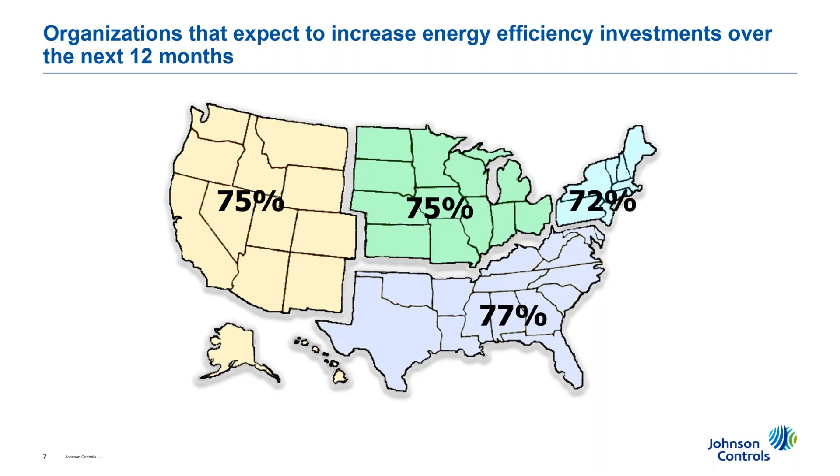One question we ask is: organizations, what did you invest in the last year? And there's about 25 different improvement measures. People generally get this right because they know what they invested in. Again, these are facility leaders in commercial, institutional, and industrial sectors.

The other question we ask is, what do you plan to invest in over the next year? The winner this year was behavior and education programs. HVAC and building controls are kind of perennial favorites, usually at the top of the list. Electric energy storage actually ranked fourth, with 59% of organizations planning to invest in electric energy storage. As you can imagine, this question 10 years ago, if we asked it, would have been incredibly small. So you see this particular clean energy technology rising to the top. Building systems integration and demand response and demand flexibility investments, over half the organizations investing in that. Next slide.

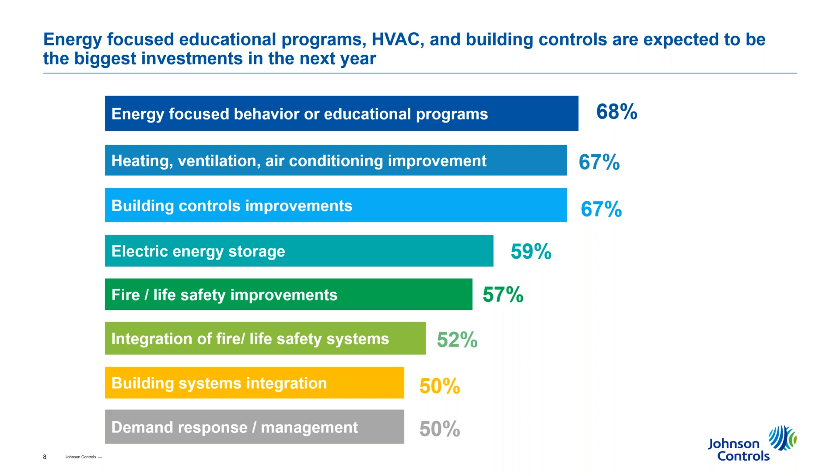So the question we have been asking for 13 years is, do you have a green certified building, or do you plan to have one over the next 10 years? This data has continued to rise, a 4% increase on average over the previous year. Here you see pretty even distribution, with the South actually having the highest percentage of already achieved and plan to achieve.

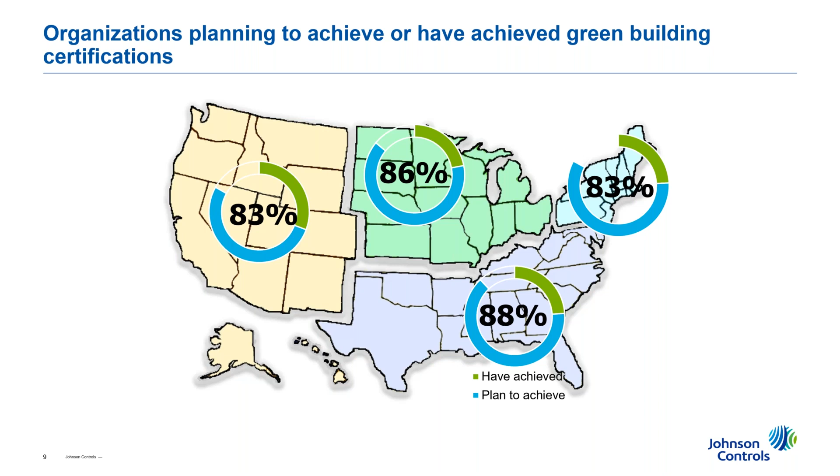Now, this is the question we've started asking over the last 4 or so years, and it's most interesting to the NBI organization and participants at the conference. That's, how likely are you to achieve a net zero facility? It could be net zero carbon, net zero energy, or near zero, which is the term used in Europe, since this is a global survey. We give a series of synonyms for super high performance buildings over the next 10 years.

This went up significantly over the past year. 67% in the Midwest, 70% in the South. What I found surprising is I expected the coasts, the East, Northeast, and the West to be the highest percentage, but actually there were higher percentages in the heartland of the United States and the South.

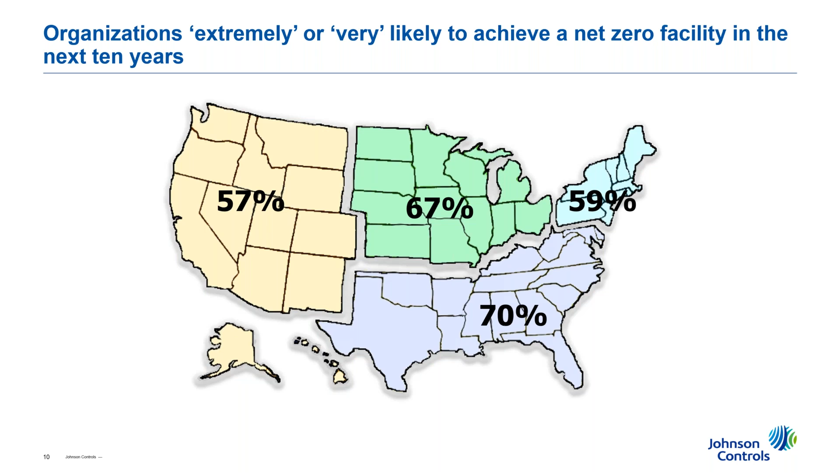One thing we did this year is, because we had so many organizations planning to achieve net zero, we had two very large populations: those planning to be net zero and those planning to be not zero. So we did a little analysis looking at the different investments between these two populations, about 200 organizations each, and I think these results are really interesting.

Sorry, Siri thought I was talking to her. Sorry about that, Siri looked up high performance buildings. Anyway, thermal energy storage ended up being very high.

Electric battery storage was ranked so high in both populations it didn't make this list. Non-renewable distributed energy generation - that's an interesting question. Why would organizations planning to be net zero energy or carbon invest in fossil fuel-based distributed energy generation? I'll tell you our hypothesis and some data to support it. Mobile occupant interfaces, which provide direct information from the building and to the building, control HVAC, lighting, and renewable energy.

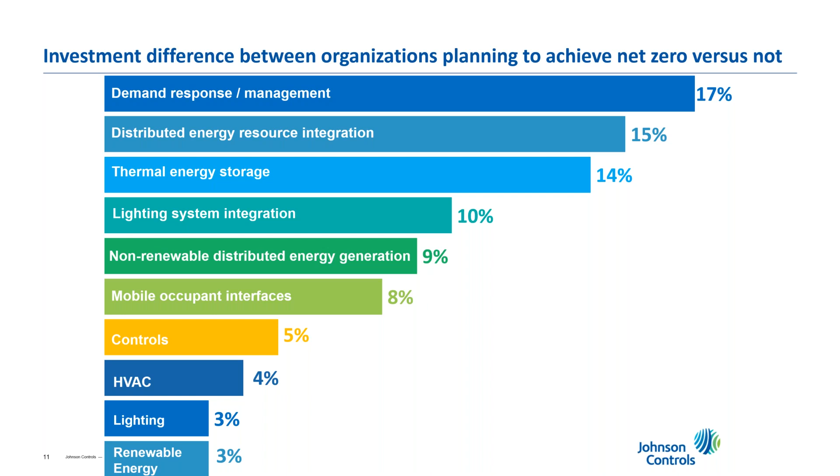Our hypothesis is that there's a tremendous overlap between organizations that plan to have a net zero carbon or energy building and those that want to be able to operate off the grid and are focused on resiliency. When we tested the hypothesis, we found an R squared, or correlation coefficient, of 0.66, which is a moderately strong correlation between those organizations. So organizations driving towards net zero are also keenly interested in resiliency and long-term operation off the grid, and investing in fossil fuel non-renewable energy, probably CHP, cogen, things like that, in addition to the more clean technologies.

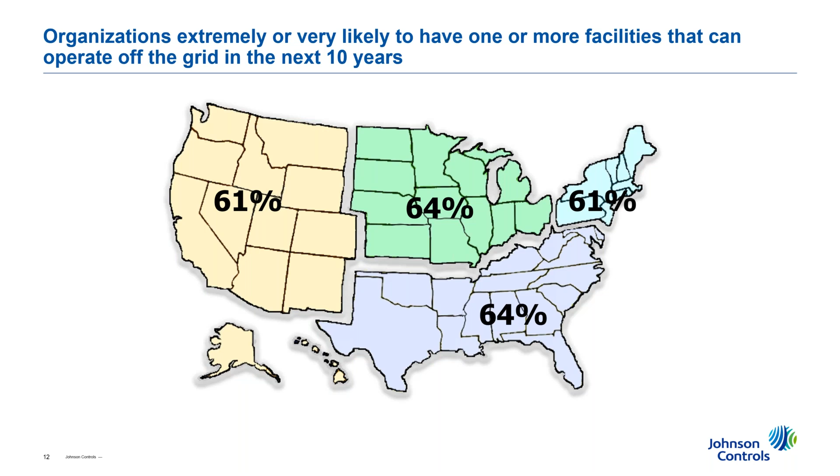So here's one key question. We asked among the measures, how many of the organizations replaced a fossil fuel heating system with heat pumps in the previous 12 months? We were again very surprised at this level. 35% in the West, 36% in the South, in the mid-30s everywhere across the country.

Generally, people believe that one of the curses of energy efficiency and green buildings is that people wait for stuff to break - they wait until a piece of equipment fails, then replace it. Unfortunately, some of the least efficient equipment tends to last too long. Proactively updating - replacing things like fossil fuel heating with heat pumps, replacing HVAC, replacing controls before end of life - is one of the trends we see increasing over the past few years, and I think that's a very positive trend.

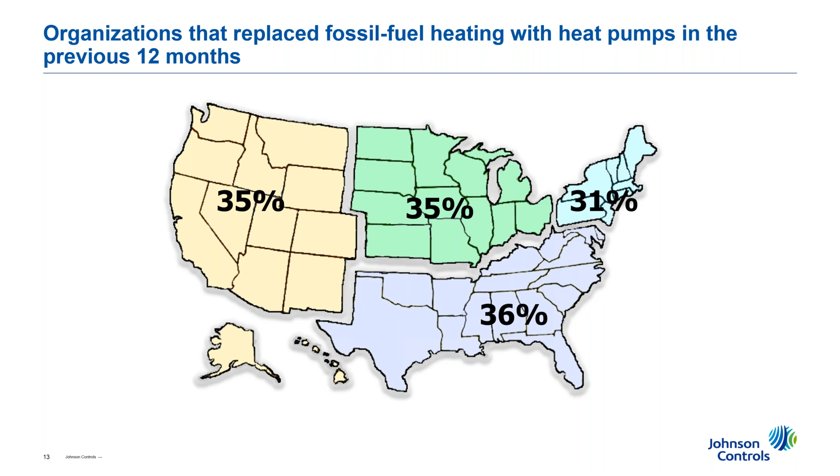So this is the sneak peek. About 3 weeks ago, we finished the 2020 energy efficiency indicator, and we asked a number of new questions that relate to the coronavirus and investments as well as impacts. And I couldn't resist the temptation to give you a peek at the results.

One thing is the percentage of organizations reporting that improved occupant health and wellness is extremely or very important increased from 62 to 74%. Not surprised at all of that.

One of the highest rated drivers for investment, 81% said that increasing the flexibility of their facilities to quickly respond to a variety of emergency conditions like a pandemic, natural disasters - think of wildfires on the West Coast, think of tropical storms, we have yet another hurricane hitting New Orleans, third time this year - that type of flexibility is extremely or very important.

I would encourage everyone, as they're thinking about high performance buildings that are net zero, they also need to be resilient and healthy and safe. Next slide.

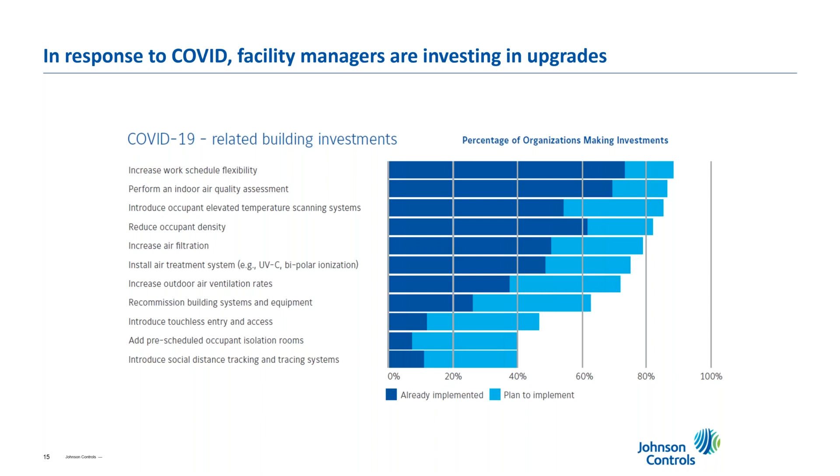This is becoming a really big surprise, but data is supporting it from all corners. Most buildings, say office buildings in New York City, are or were at their bottom, about 4 to 6% occupied. And what's been surprising is how little the energy has dropped.

I think what this is teaching us is that as we're adding flexibility to facilities, we need to be able to dial down. GRESB portfolio of buildings, which tend to be higher performance and greener, are doing better - they're in the 30 to 40% range. And anecdotally, net zero buildings, which really control plug loads and really control at an individual occupant level, are able to dial down even more. I think this is a key attribute in all high performance buildings in the future.

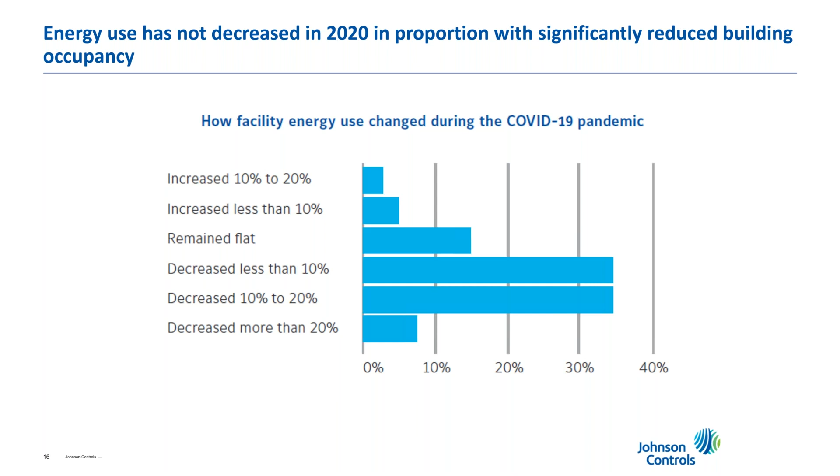So that ends my sort of update presentation here. And now I'd like to introduce our next panelist.

Shanti Pless joined the Commercial Building Research Group at NREL in 1999 with a focus on applied research and design processes for commercial building energy efficiency and building integrated renewable energy. He's leading the development of the next round of advanced energy design guides and managing the whole building systems integration section of the group. Shanti, over to you.

Thanks, Clay. Welcome all. And I kept my title slide from a year ago here. This is a subset of what we talked about from a year ago. So well, 10 minutes to quickly go through what we saw a year ago.

I probably have some new updates since then, but kind of set the stage for the remaining speakers to kind of think about and talk about the future of energy efficient buildings as the grid changes.

You know, I think as a building energy efficiency researcher, I spent 20 years focused on things like zero energy buildings and zero energy design guides and really aggressive energy efficiency. That was all about kind of saving as much energy as possible, any time of the day, any time of the year, and netting out kind of your renewables over the course of a year. That was kind of the first generation of net zero energy buildings we've all been working towards and on.

And looking for the next 20 years, how is that going to change? The key element we're looking towards is how this new era of cheap renewables on the grid will change, and how the future of buildings and future of zero energy buildings will have to adapt - what's their role, right? That's kind of what I talked about a year ago.

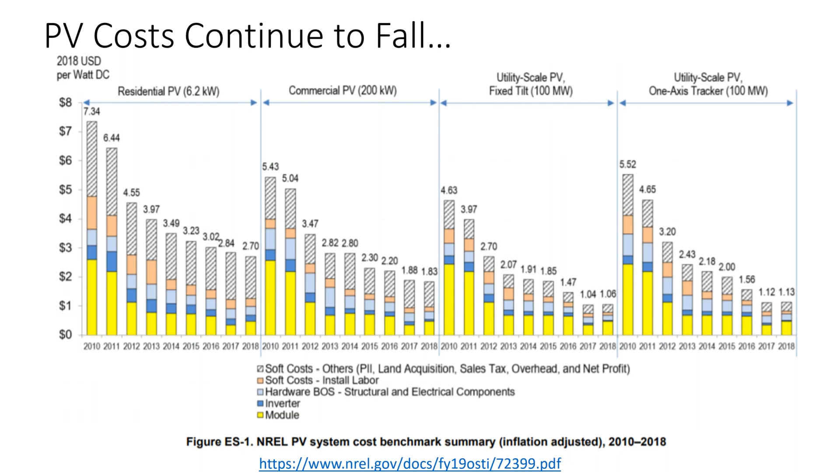Wind, solar, and storage also have similar cost declines. I'm at NREL in Colorado, so we track what's happening locally pretty closely just to get a sense of it. Our utility here, Xcel, is planning to install new generation and put out an all-source bid.

The average they got back was 1.81 cents a kilowatt hour for a combination of solar, wind, and storage. That started to open our eyes up, and then they went back and got more firm bids on that all-source call: solar storage at 3 to 3.5 cents a kilowatt hour, wind lower than that.

So we're starting to see these projects put in place, and that's really driving commitments statewide to get to 50% renewables in the next few years. As large utilities like our utility here in Colorado, Xcel, or others are now making these commitments, in this past year they've committed to 100% carbon-free electricity by 2050.

And so as they see these cost curves, this is kind of where the macro scale seems to be going on the grid. As an energy efficiency researcher, for all of us who've spent the last 20 years trying to figure out how to get utility efficiency programs in place to take advantage of historically the lowest cost of energy—the energy you don't use.

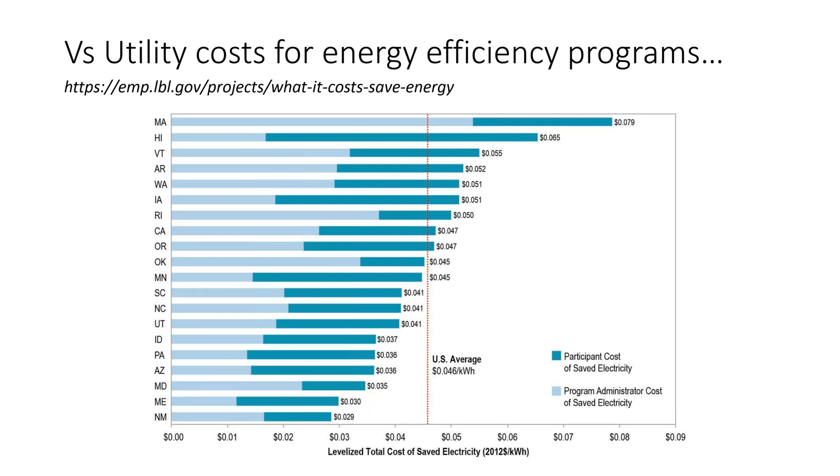We think about whether typical utility efficiency programs will go down—there are significant investments over the years in those. Saving energy in hours of high renewables on the grid, where the marginal cost and marginal carbon on the grid may be negative, is maybe not so much of a benefit anymore to save energy at all times. So kilowatt hour savings anytime, anyplace is now becoming important for us to think about as kilowatt hour savings at the right time, in the right place.

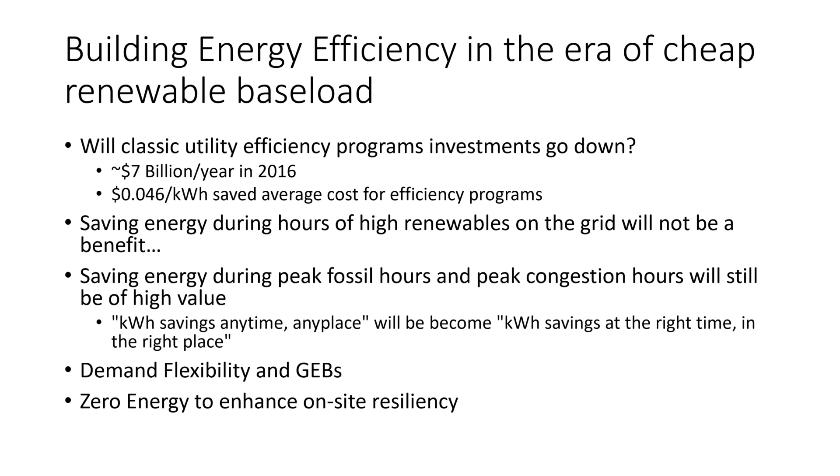As we transition that thought, this concept of demand flexibility in buildings—what the Department of Energy and others are now calling grid interactive efficient buildings, or GEB—starts to value demand flexibility and responsiveness to the changing renewable content on the grid. And as Clay mentioned, zero energy enhanced on-site resiliency is definitely making the case for better demand flexibility and storage integration.

From a simplistic point of view, you look at the grid where you've got high net load in the later afternoon, say in California, with low renewables on the grid, and significant low net grid demand hours in the middle of the day. That's starting to create some simple ideas around moving load from those peak hours later in the day for your utility. Every utility in the United States seems to have a different version of this, whether it's a wind-dominated grid, or solar storage, or when your wind peaks seasonally.

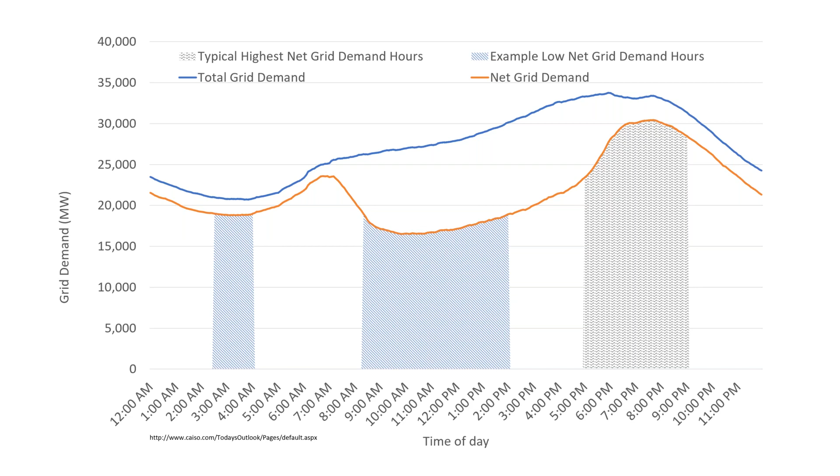So understanding how your utility is adding renewables and what that resource looks like will then allow you to think about your demand profile. And I think it became real for me when I saw major tech companies commit to 100% renewables a long time ago.

So they bought a bunch of offsite renewables, owned a lot of offsite renewables, and netted out where they owned or purchased more offsite renewables than their loads in 2017. But then they started realizing what's next, and for them it was about how to match their renewables on an hourly basis with their loads.

This is the idea of 24/7 carbon-free energy. So they've spent the last couple years trying to figure out how to reach 100% renewables, 100% of the time.

Going forward for buildings with net zero energy goals, starting to think about how well, on an hourly basis, your load matches your renewables so you can target this goal of 100% renewables 100% of the time is in line with what some of the big tech companies are thinking about.

They do things like move compute in their data centers around to different parts of their facilities where they have high renewables for every hour, and if there's a high mismatch, they can move that compute to other data centers with a lower mismatch. Really innovative strategies are coming out that target this goal of 100% renewables 100% of the time, whether in your building or on the grid.

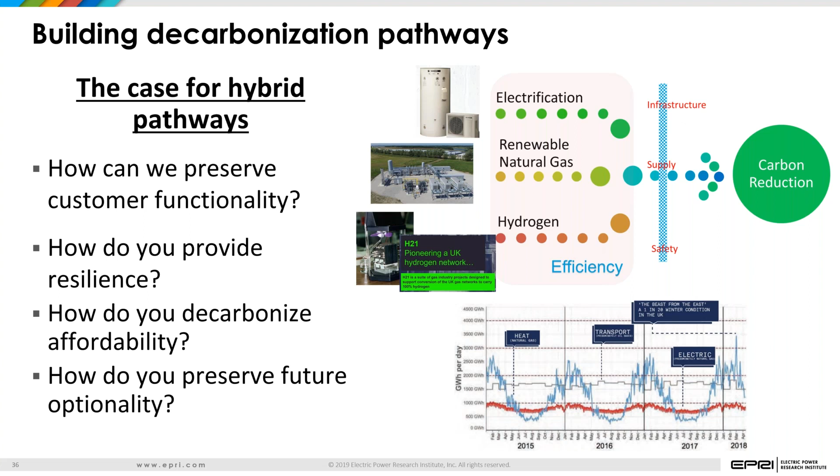So that's the approach that I'm going to take in the presentation. I'm going to run through very quickly through some use cases, some of the field demonstrations and the learnings from those, and hopefully we leave with more questions than answers as we go through the presentation. I'll be going quickly through some of those.

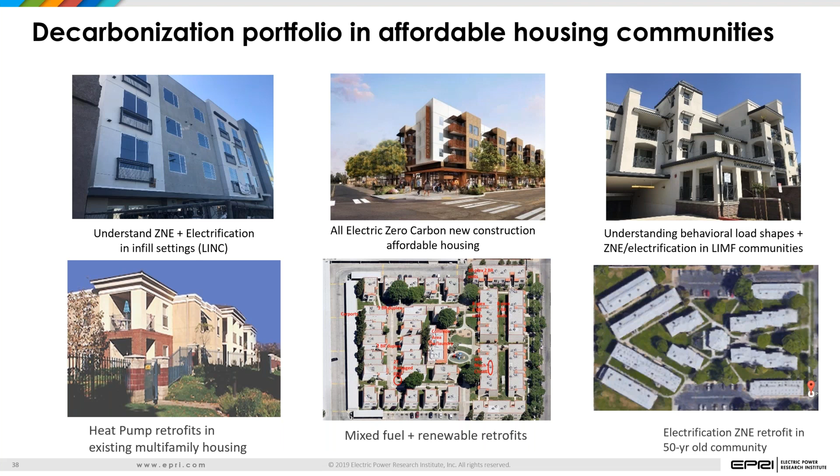We talked about some of the zero carbon communities. Clay already talked about it. I'll skip through this. There's a lot of work that we do in actual field implementation, especially working with affordable housing and multifamily communities. We do a lot of work in single family new construction. So there's a lot of lessons learned in actually applying these technologies, not just from a technology analysis or a lab perspective, but what happens when you put technologies in the field and customers interact with them.

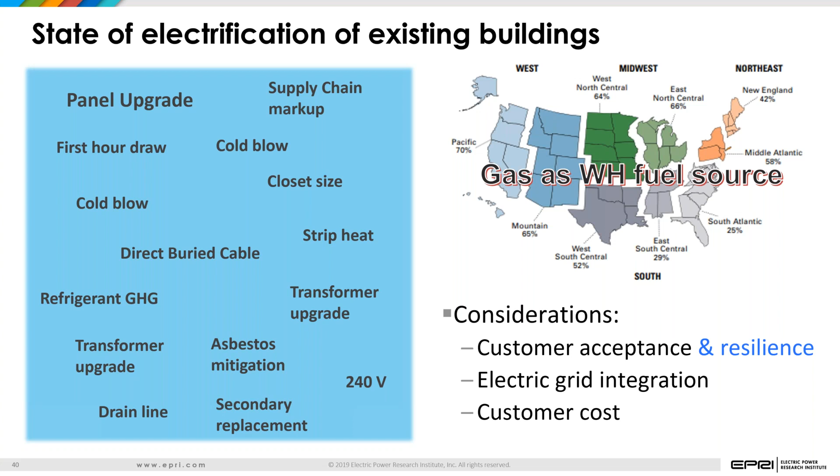Again, a whole range of different types of smart communities that we work on. And finally, when we get to the state of electrification of existing buildings, what do we run into? We run into supply chain markups, panel upgrades. We can't have availability of heat pumps in some places. We have issues like direct buried cable, where the electrical infrastructure is not ready to have electrification. We run into things like asbestos mitigation as you try to punch through walls in 50-year-old buildings. So all of these issues start popping up as real-world costs and barriers when you start addressing electrification.

So what have we learned? Quick summary: heat pumps. One of the biggest things that we see is that there's a supply chain issue. Manufacturers don't work directly with the end customers. There's distributors in the middle. A lot of the areas, the distributors are not ready. There are markups on heat pumps, all of which makes it harder to electrify because the end customer ends up seeing an increase in cost, or the supply chain's not ready.

So one of the things that we look at is, okay, what happens if every air conditioner sold starting today is a heat pump? What will it take to get there? That's almost like a no regrets approach that we would love to take.

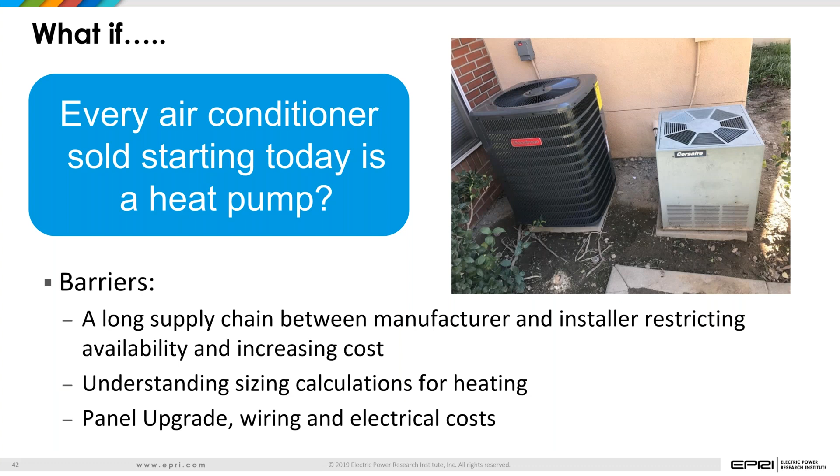And so some of the results from heating electrification, one of the things we want to emphasize here is that deep efficiency is an enabler to electrification. In many places, if you electrify and do the fuel switching, customer bills are going to increase if you don't do the efficiency. This is an example where we worked on an existing affordable housing community in Southern California, so the heating loads are lower, but because of the deep efficiency, we were able to reduce the overall net electrical usage, even with electrification of heating. That's because with insulation in the roof, adding insulation in the wall, replacing windows, you're able to substantially reduce the cooling load so that the reduction in cooling load overcomes the increase in heating load in the winter.

Deep electric efficiency's other advantage is that you also reduce or avoid backup resistance elements, which are a driver for grid impacts from electrification.

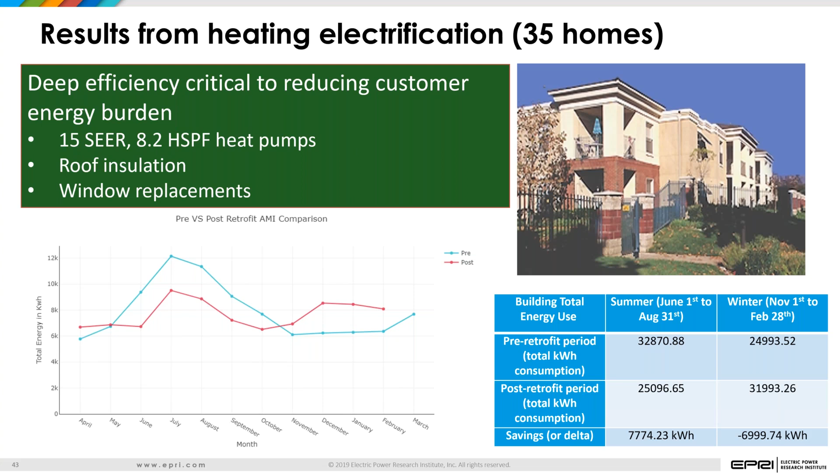Quickly running through some of the solutions we've been working with: when you go into existing buildings, you don't have enough electric infrastructure. One example is 120-volt heat pumps, brought in from Italy to replace existing evaporative coolers. There's not enough electrical service in this building for standard heat pumps or heat pump water heaters, but the good news is we got them in, got the data, and they look like they work well. So it's about looking at optionality and technology options that can help us overcome these barriers.

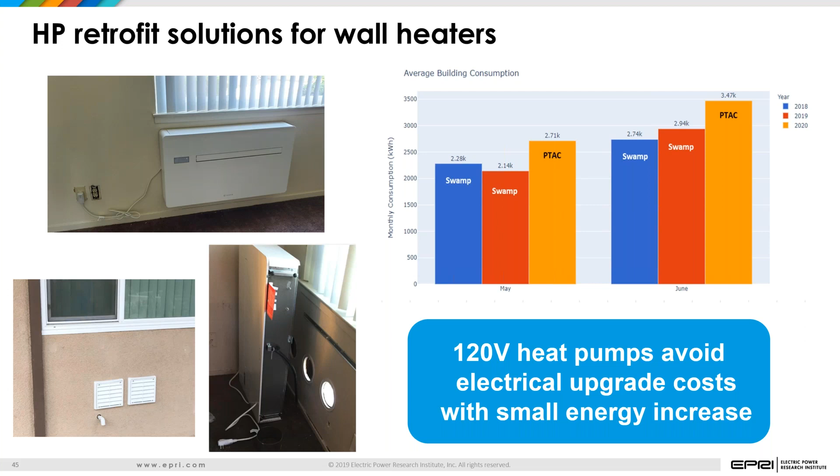Key takeaway: wherever you have air conditioning, let's try to change that over to heat pump retrofits. Heating electrification also captures significant carbon savings.

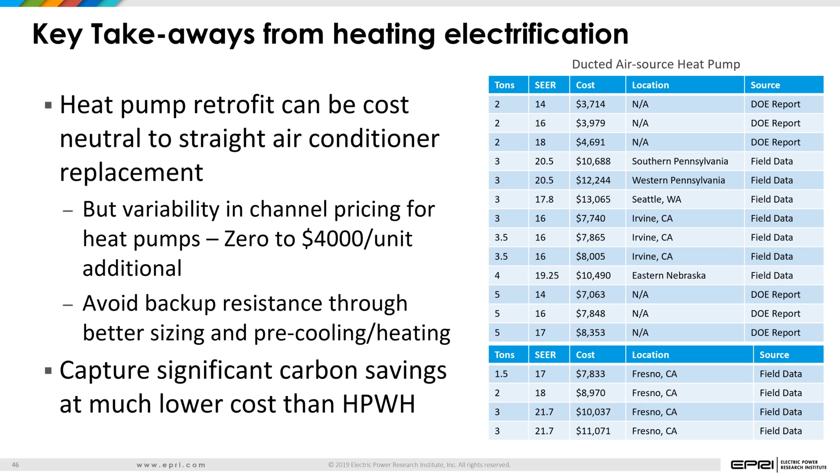Heat pump water heaters—here it's more about aligning the products to the markets. We have a lot of products today, but I'd like to encourage us to look at a multi-pronged decarbonization strategy for water heating, combining efficiency, renewables like solar thermal, and electrification. How do you put them together for a more integrated, more affordable, low carbon solution for water heating?

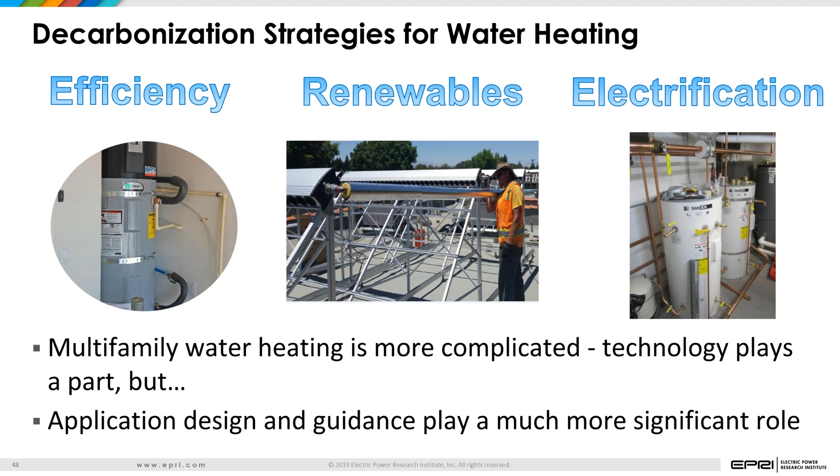Upgrading water heating, we run into significant costs, especially on the electric distribution side—panel upgrades, extra wiring for 240-volt elements, replacing 40-gallon water heaters. There's not a 40-gallon heat pump water heater, so you end up with construction costs. There's a lot of different costs when you try to fit existing products into market segments like multifamily. So how do we address that?

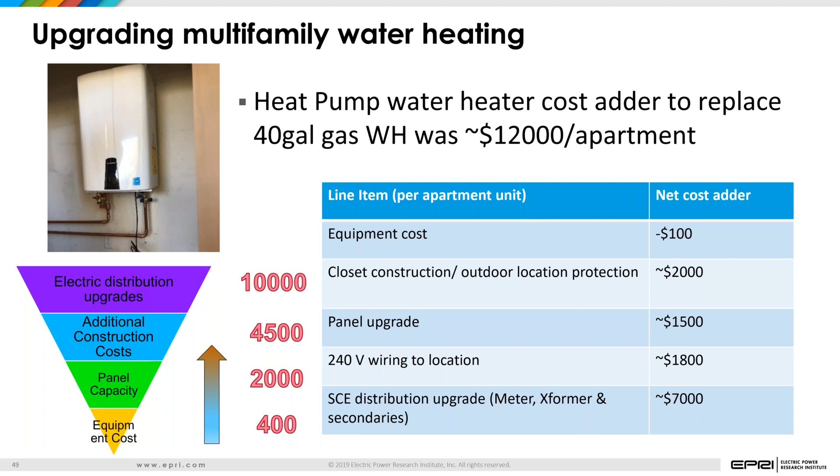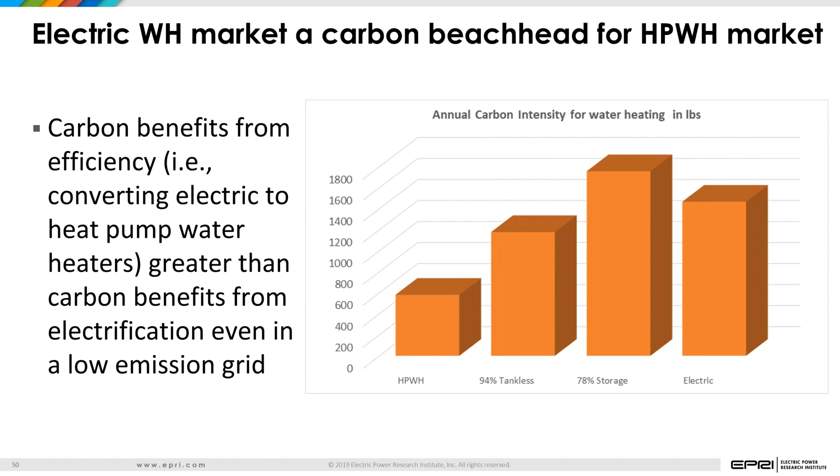One thing we'd like to look at is beachhead strategies—can we go first, address all the electric resistance water heaters, replace them with heat pump water heaters so you scale the heat pump water heater market? The heat pump water heater market today is about 85,000 units nationally, about 1% of the national market. So how do you scale new technologies like heat pump water heaters? What are the beachhead strategies that can give you carbon reductions today?

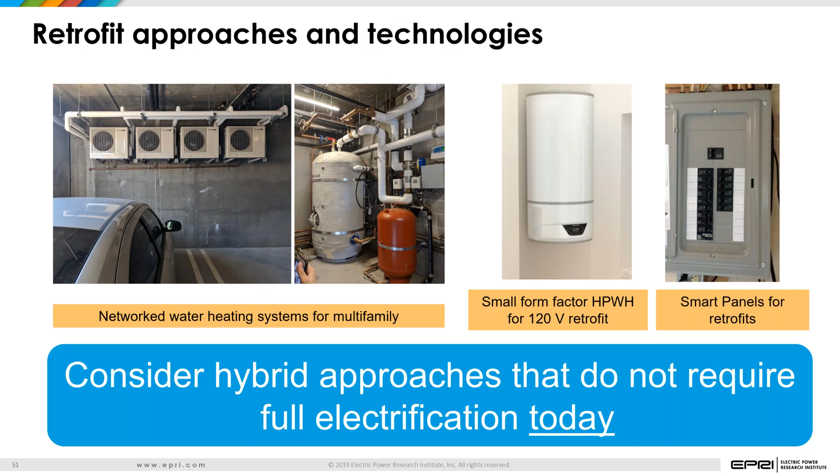Other retrofit approaches involve looking at hybrid approaches. Can we take the smaller form factor heat pump water heaters common in Europe and Asia and use them in conjunction with existing water heaters, reducing the cost of retrofits while still shifting maybe 70-80% of energy use from fossil fuel to electrification? So instead of trying to convert 100% of heating energy use but only reaching maybe 5% of customers, would it be better to take out 70-80% of heating energy use across 30-40% of customers? These are the types of hybrid approaches we're starting to look at.

Of course these are very early days, but the question is: what can we do today that's cost effective, that's resilient, and takes out a substantial amount of carbon, knowing that in a decade or so we can come back and sweep up the remaining carbon in our buildings, with new technologies or approaches available by then?

Finally, looking at how you aggregate customer resources—yes, we can do electrification, and Shanti talked about how to do that 24/7 carbon free. So aggregation becomes a bigger play, and there's work going on in terms of how you aggregate end-use resources and end-use loads.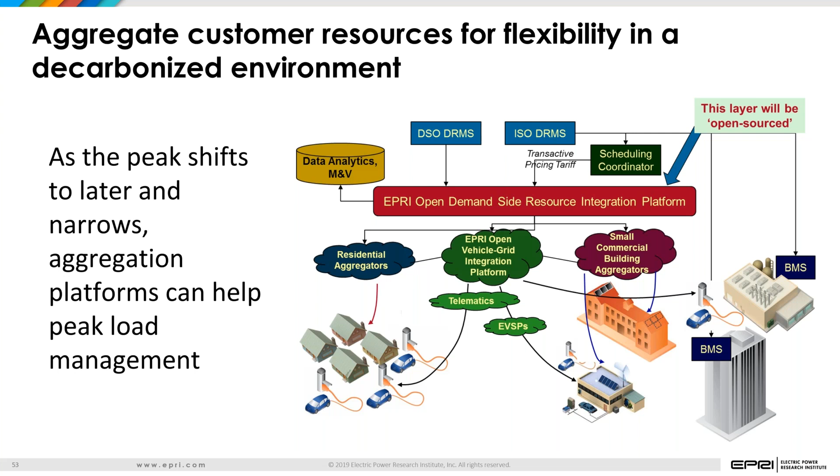Where do we see the highest potential for flexibility? Smart thermostats are a great option—they're inexpensive and can go on existing buildings and air conditioning systems. Research shows there's substantial flexibility to be gained through pre-cooling and other adaptive, customer-centric strategies with smart thermostats. The other area is EV charging management—more in development, but as we get into grids with high carbon intensity in the evenings or nighttime, EV charge management might be critical for decarbonization.

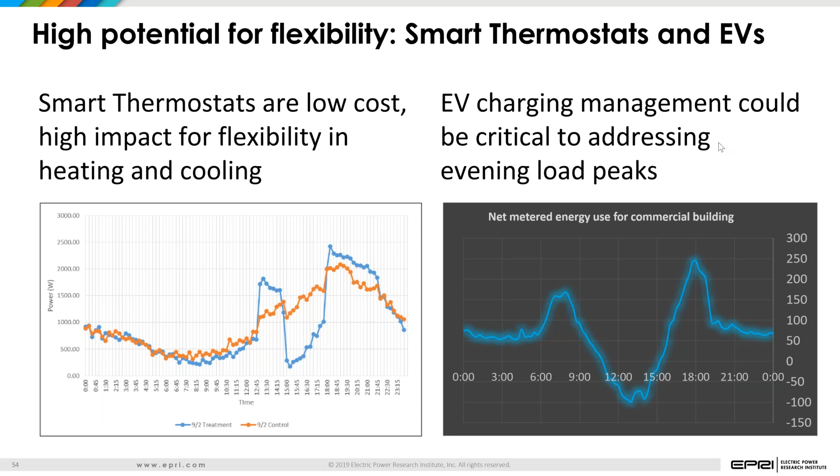And finally, summarizing the takeaways from the presentation: consider the customer—what is important to them? Affordability, resiliency, and carbon savings go hand in hand, so reduce first cost.

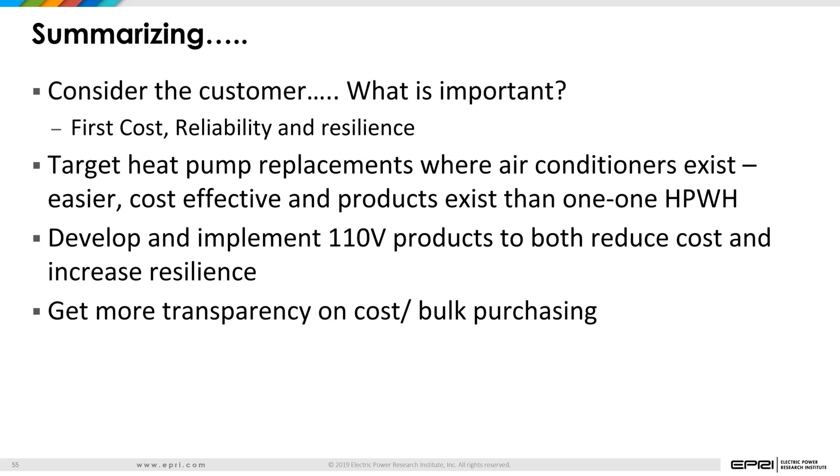No regret strategies include things like targeting heat pump replacements, being able to do deep efficiency. Efficiency is a no regret strategy to decarbonization. Let's scale that today. Let's look at things like 110 volt products, so that can both reduce cost and increase resilience. We need to get more transparency on cost and bulk purchasing so that we can reduce the cost of electrification where it makes sense. And let's try to electrify in an appropriate manner. We could leave gas backup or look at dual fuel heat pumps, for example, to avoid grid upgrades and provide customer resilience.

So with that, let me turn it over to our next speaker. And back to you, Clay. Thank you. Thank you, Ram.

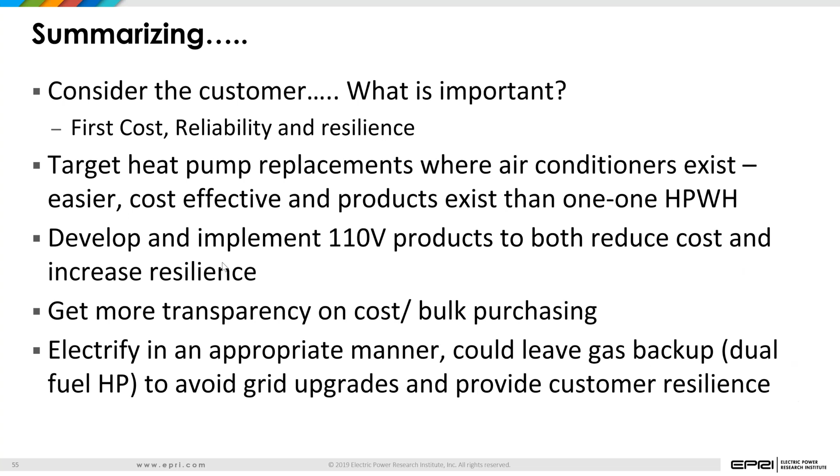That was a great presentation, and it was exciting to see some of the 110 volt heat pump technology coming in from Europe and being applied in these very challenging environments from both a cost and an installation perspective. So really appreciate that overview. I feel more optimistic that there are pathways towards decarbonization that would leverage existing infrastructure and bring in electrification at scale.

Our last panelist is Richard Young. He is the director of the Food Service Technology Center, a publicly funded energy efficiency research facility operated by Frontier Energy and known to most industry insiders as Fishnick. I'm sure there's a story behind that, but I don't know what that story is. What an interesting name. Richard is a former member of the National Restaurant Association's Conserve Advisory Council and is a past fellow of the Hobart Center for Food Service Sustainability.

Richard, over to you. Clay, thank you so much. Hello, everybody. I'm going to talk a little bit about kitchens, and I'm going to cook through my slides today because we have a lot of information to do in 10 minutes.

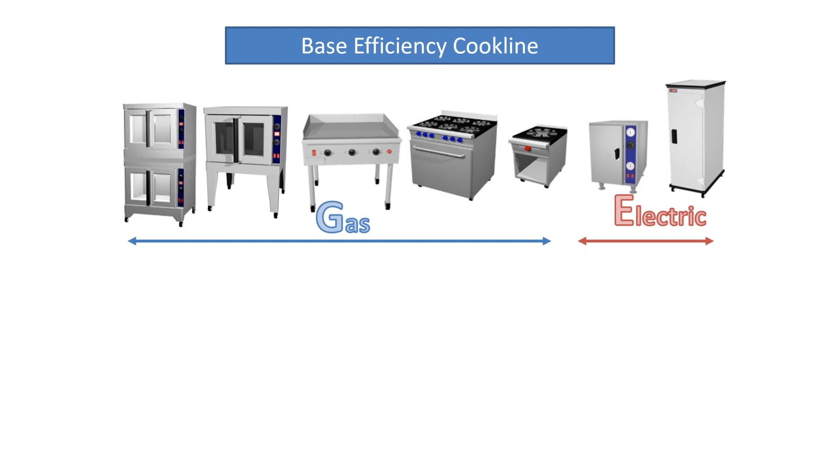So I want to start our discussion with a story about a real restaurant. It's a small chef-owned, independent restaurant in Pleasanton, California. Superb place to eat. If you ever come out and visit me in San Ramon, I'd love to take you there. So the chef, Chef Matt, who was trained at the Culinary Institute and cut his teeth in fine dining in New York, wanted to start his own restaurant. And if he had just done what he learned at the Culinary Institute and in these high-end New York restaurants, or gone down to the local equipment dealer, he would have set his kitchen up with a very base efficiency cook line that was mostly gas appliances with a couple of electric appliances.

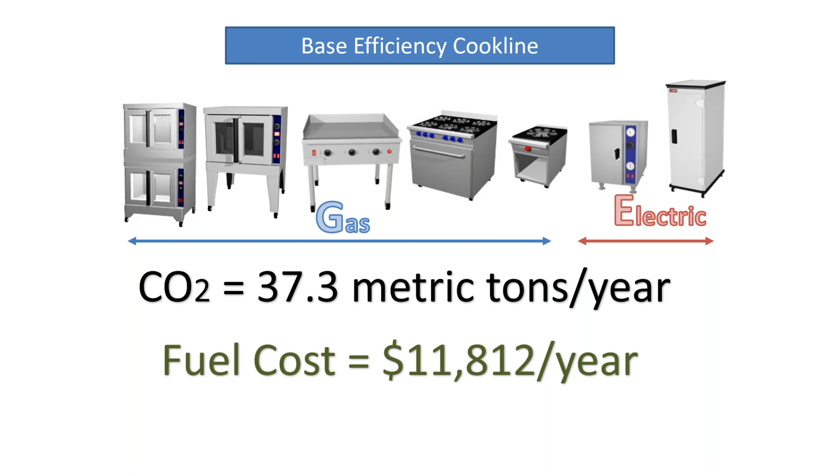Now, this cook line would have generated about 37 tons of CO2 a year, and it would cost him about $11,000, almost $12,000 a year, which is a lot of money to operate. And I have to let you know that this cook line is basically a 1950s design. It really hasn't evolved much. And in fact, this sort of very basic cook line is going into many of your high-end projects today. You may be building what you think is a LEED Platinum building, and it might have this kitchen in it. So food service, in many ways, is very behind. It's very typical to see this kind of unevolved technology.

If we were lucky and Chef Matt had been connected to our utility energy efficiency programs, perhaps he would have bought some efficient equipment, some Energy Star equipment, and upgraded that line. In this case, his energy efficient cook line would have been generating about 25 metric tons a year, and the fuel cost would have been $8,000. And so what we've got there is a savings of 11 tons of carbon and almost $4,000 in operating costs.

For a small operator like Chef Matt, $4,000 is a lot of money. That goes directly to his pocket. He would have to sell roughly $80,000 worth of food at 5% profit to make $4,000. It is a very tough industry.

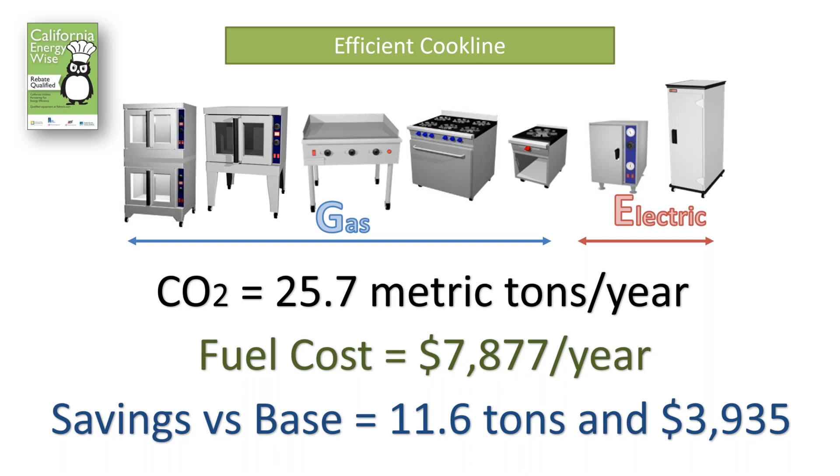To touch on Shanti's point about energy efficiency, in some of your more advanced buildings the benefits may be declining, but in an industry that is still stuck in the 1950s, energy efficiency is absolutely the first and most important thing you can do to cut carbon in these buildings.

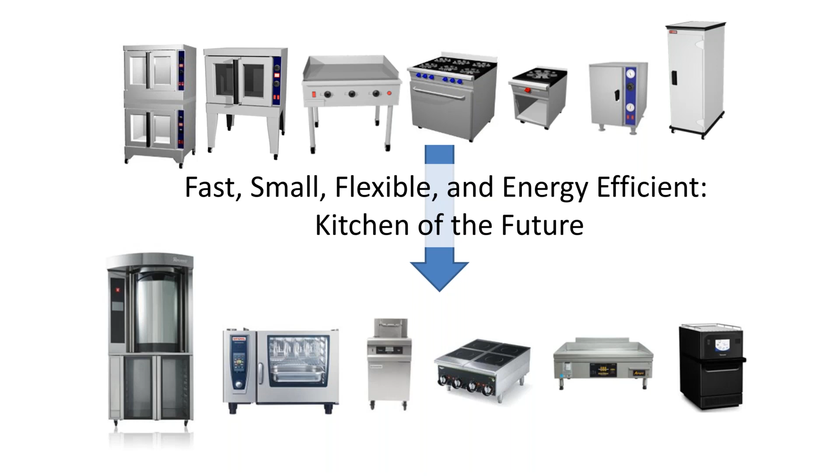What happened in the real world is that Chef Matt came into our facility in San Ramon and worked with our consulting chef, Mark Dusler, taking about 6 months to try out different equipment. Chef Matt wanted to come up with a kitchen that was faster, flexible, a kitchen of the future. So we took him from that traditional 1950s kitchen and hooked him up with really cool equipment like small half-size rack ovens, combination ovens, induction cooktop, super high efficiency griddle, and high-speed ovens, allowing more food production in a more consistent way with less labor and less space. That's really the kitchen of the future.

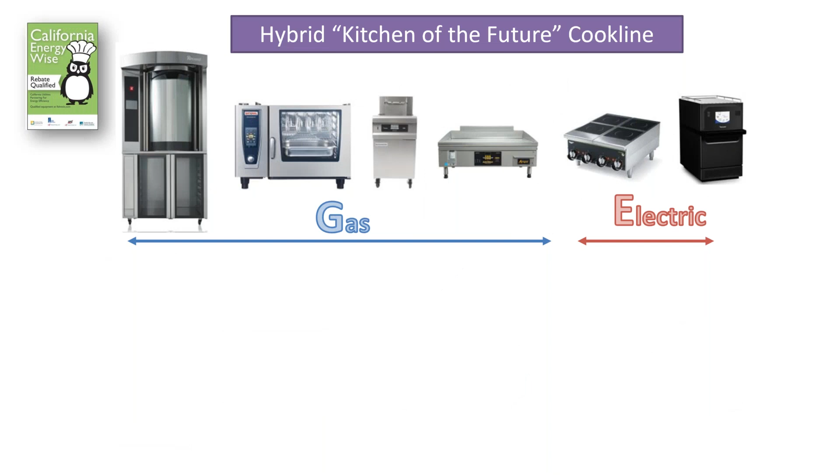So here's the kitchen that Matt actually ended up with. It's still a hybrid because it's still gas and electric, but now we're looking at a CO2 of 13 tons a year and fuel cost of $4,000 a year. We've dramatically reduced our CO2 and fuel cost, saving 24 tons off the base case and almost $8,000 off of Matt's operating costs. That is pretty amazing.

This is actually the kitchen that is installed in Saltcraft, Matt's facility. It is the best economic return for his dollar with the most reasonable carbon savings. The point being that we have to keep Matt in business and keep his cost to operate low.

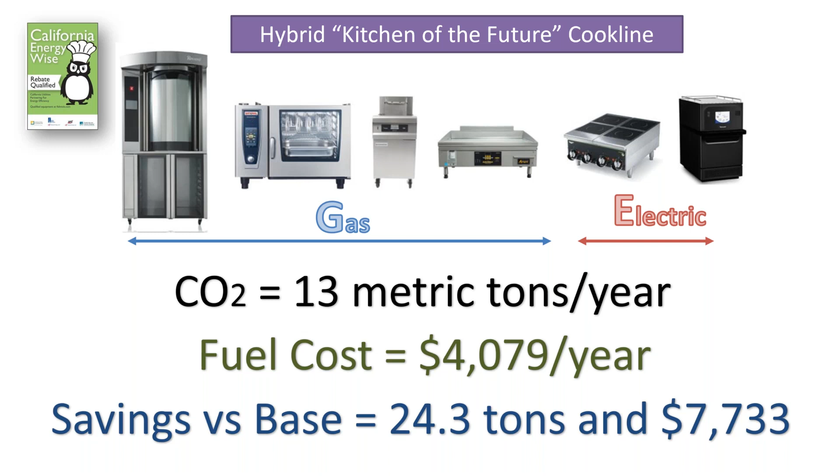Half the restaurants out there are owned by independent operators, and half of those have probably perished because of COVID. This is a very strained industry, but it's also a $900 billion industry. Most of the unemployed people in the United States right now are former hospitality workers. So this is an industry that we cannot just stomp on — we really have to work with them to try and rebuild them.

Had we been able to take one step further and take Matt's kitchen all electric, we could have gotten his CO2 generation down to about 5 metric tons, based on PG&E Northern California CO2. It's worth noting in other parts of the United States, going all-electric might have made his carbon go up, but PG&E has very low carbon power, so 5 metric tons a year — though his fuel cost is now at $9,000. Our CO2 savings are 32 tons.

That's huge, and our cost to operate savings are still a couple thousand dollars better than that base efficiency kitchen. So that's good news, but it did add some cost to operate back onto this kitchen, which may or may not be feasible. If we valued carbon, if we paid Matt to reduce carbon, then the all-electric kitchen would absolutely be the best way to go.

But we're still charging Matt based on kilowatt hours, time of use, demand, all of this kind of stuff. So this kitchen is really not affordable for him, although it's totally affordable for your Googles and your Microsofts and all the big high-tech folks. This kind of increased cost is a drop in the bucket for them, and in fact it's a savings over the base kitchen.

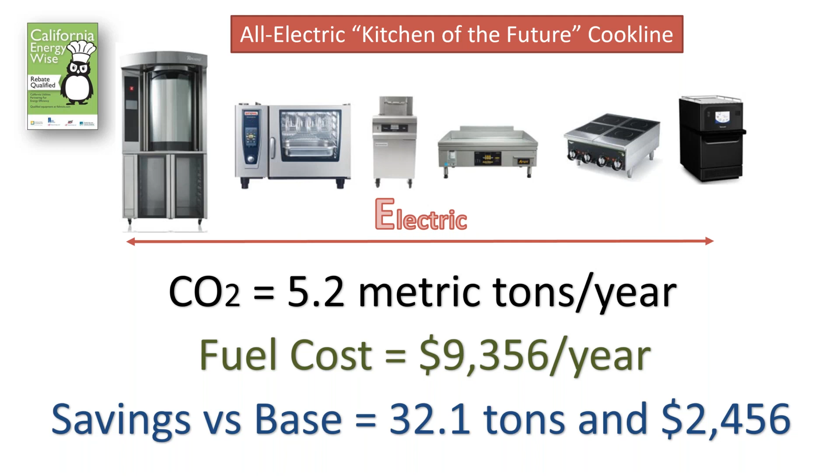To summarize: our base efficiency kitchen is the 1950s kitchen typically being built today. If we can convert people over to just a high efficiency kitchen, we dramatically reduce our carbon. The green bars show cost to operate, and the gray line shows carbon on the right y-axis. We dramatically reduce carbon and cost to operate just by getting people to go to high efficiency equipment. That gets us to our 2030 carbon goals. But let me tell you, that's like moving a mountain.

When we show food service people the third bar, the hybrid kitchen of the future, they're all like, well, that's the one, let's do that. Lowest cost to operate, very low carbon. The challenge is most people in the food service world have no idea how to do that. Even the highest end engineering firms have no idea how to do that. Sadly, most of that knowledge lies with us at the Food Service Technology Center, our little crew. So we encourage you to contact us, work with us. You don't get to the hybrid kitchen of the future without some real thoughtfulness.

It just doesn't happen. And then of course, there's the electric kitchen of the future. Our cost to operate rises up, but the good news is if you put in that engineering time, you can still make your all electric kitchen operate at a lower cost.

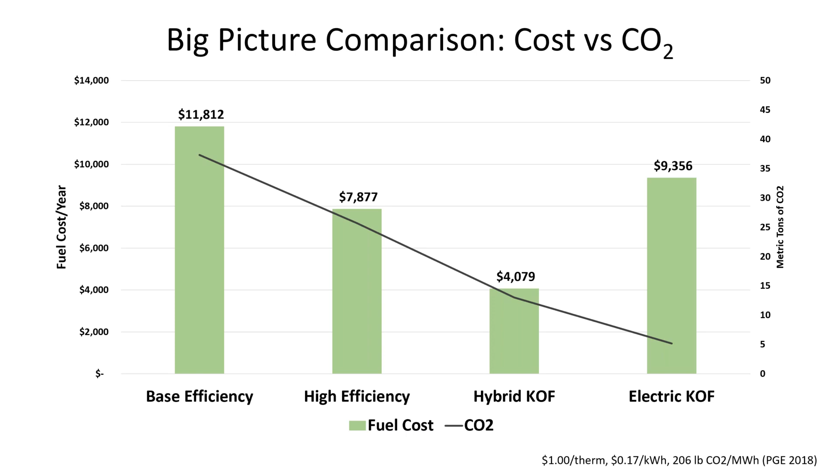So a couple of realities. Full electrification is not currently economically feasible for many commercial kitchens. I used to have most, but I would say it's many, particularly with this audience. A lot of your bigger facilities can do all electric, but you really need to come work with us and do it right. I've seen some all electric projects go down the tubes because people modeled them improperly. And really to make this happen, we need some economic policy and grid system changes. The food service industry falls right on a lot of these high demand periods. We need to figure out how to work with them.

Reality number two: significant decarbonization is achievable immediately by upgrading to energy efficient gas equipment. That backs up what Ram is saying. It's a staged process, and there is so much low hanging fruit right now that we're not getting to, that we really should be hitting. Just to put it in perspective, if you took all the money that's been spent on energy efficiency programs over the 3 decades that I've been in this business, it equals about 4 days worth of the energy bill for the food service industry. We have put one grain of sand on the beach into this process, and we're way behind.

So our electric challenge: electric appliances cost significantly more to operate. So you have to design smart. You can't just do a one-for-one swap and think you're done. And designing smart means you go to the smallest piece of equipment, coffee brewers, conveyor toasters.

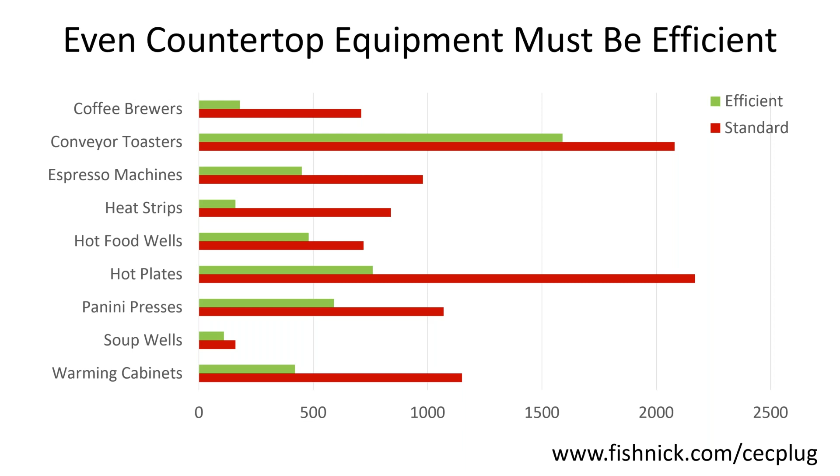This is a study we did for the California Energy Commission. You can go look this up at fishnick.com, CEC plug. It shows that you can save a third to two-thirds of the energy on all of these standard little countertop pieces. So from the smallest systems all the way up to bigger systems like kitchen ventilation, we need to do demand control kitchen ventilation. We need to make that a standard. Any technology that can reduce your power average by 57% across a wide variety of kitchen types is something we should be using right now today.

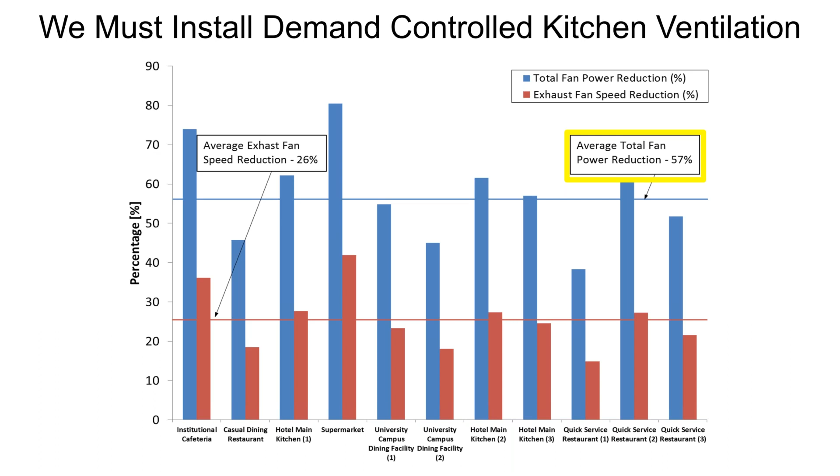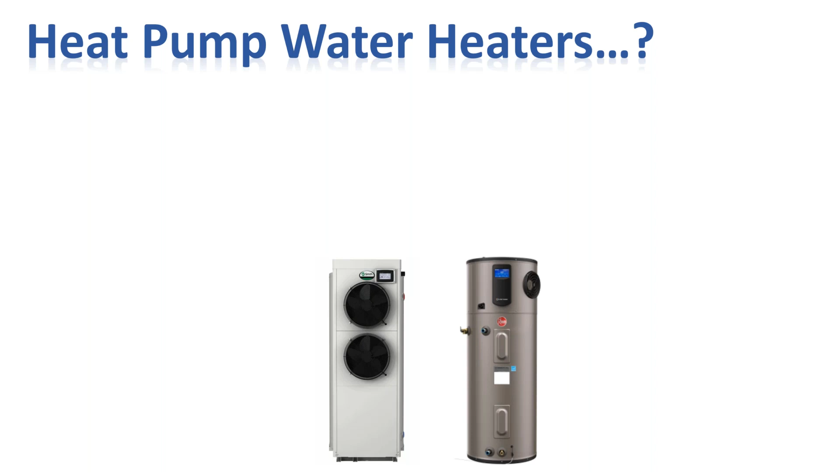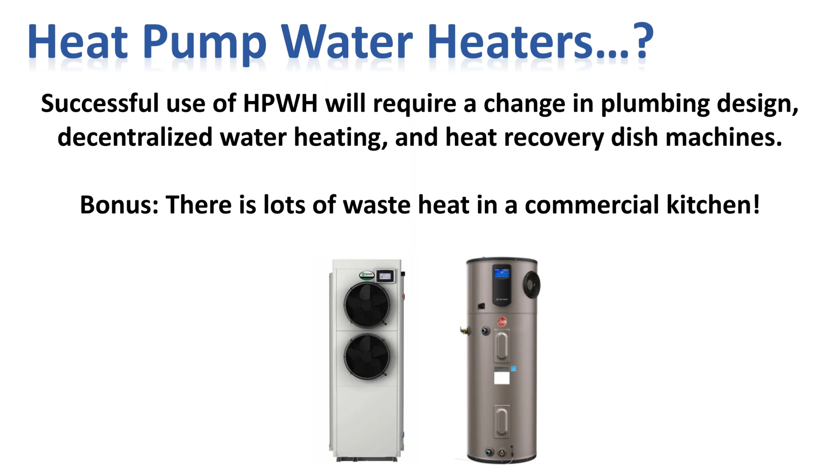And then heat pump water heaters. This is the biggest challenge I see. The problem is that we don't have any field data on heat pump water heaters in commercial food service, and we need to do that. We're working to try and get some studies, but if anybody wants to work with us, come contact us. We know a huge amount about water use in commercial kitchens, and we know that most of your facilities are designed improperly. If you want to do heat pump water heaters, you have to change your plumbing design, go to decentralized water heating and heat recovery dish machines. But there's a bonus: there's a lot of waste heat in the commercial kitchen, so that's a good thing.

So what do we have? We have lots of equipment choices, and we have the Food Service Technology Center as a brain trust. What do we need? We need more equipment testing. We need more data for design to make this happen. We need a lot of hands-on education and industry outreach. This massive $900 billion industry is somewhat blind. And we need policy solutions that consider the operators. We just can't force these small business people to jump into all electric without giving them a positive ROI.